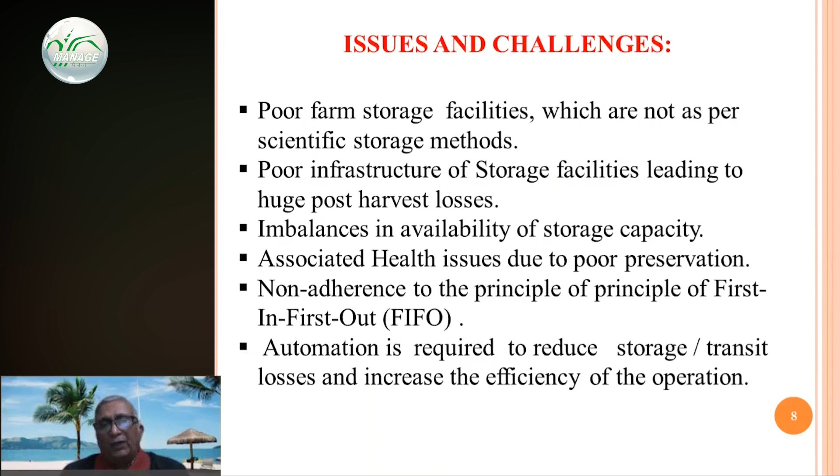This is a mind-boggling cost of losses in food grains. Food grains from agriculture production pass through various channels. It is handling at your mandis, then bagging at mandis, transportation, then again to railway goods shed where poor infrastructure is there, then processing and packaging, then to wholesalers, and finally to the consumer. In this entire chain, everywhere the food grains are lost.

According to the World Bank report, 1999, post-harvest losses in India amount to 12 to 16 million metric tons of food grains each year, which by very conservative estimates comes to more than 50,000 crores, which could actually feed 1/3 of India's poor. Even according to the report of the Ministry of Consumer Affairs, nearly 60,000 tons of food grains got damaged and became useless for human consumption between 2013 and 2017-18.

You see, mandis, where the stock is coming. Even the slightest rain causes damage to the grains. These wet grains are not suitable for consumption, rather they add to more cost in keeping them and disposing them. Sometimes the cost of disposal of these grains is also very high, and this grain which is affected with rainwater is responsible for causing so many fungus, so many bacteria, and unhealthy food availability to our masses.

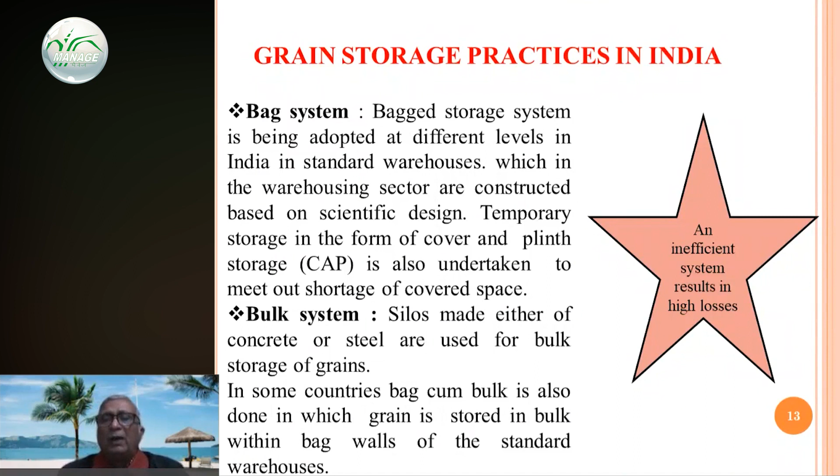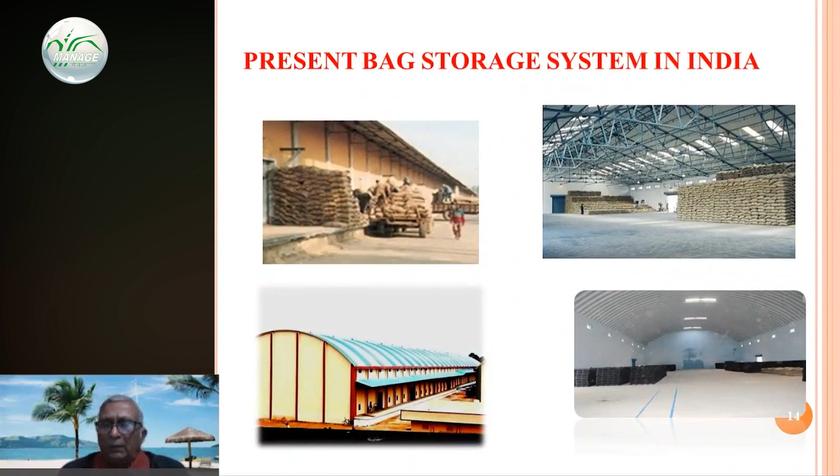This bag system is not considered very efficient because the resultant heavy losses due to handling operations or inefficient handling are quite high. It is a labor intensive system. A lot of labor is required. Multiple handling is there. Multiple handling is leading to heavy losses from farm to fork.

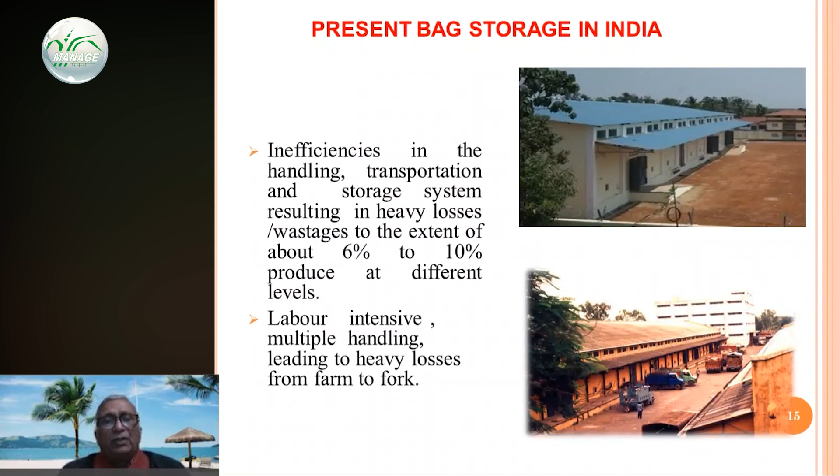Cover and plinth storage in India, though it is a temporary storage meant for just a few months, at times is continued for years together, leading to huge losses. Most of these stacks are made of 150 metric ton capacity on a good plinth, but sometimes the plinth is not a good one and drainage is not sufficient. But this has only one advantage, that it is low cost, nearly around 25% of the cost of the godown storage. But the losses are much higher, not only in terms of grain, but in terms of monetary loss to our country.

Traditional system, we were having these mud bins. Presently, we are having this bag storage. In future, we need to go for silos, preferably steel silos.

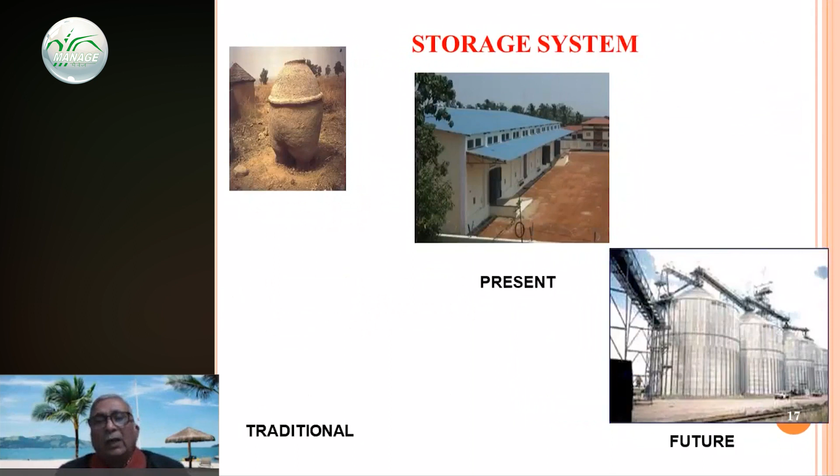Now, I will discuss with you temporary storage structures used in India and other countries throughout the world. There are different types. Cap storage, as you know, you have already seen that. Then flexible silos, bunker storage, prefabricated relocatable warehouses, cocoons, or large plastic membrane bags. I'll discuss one by one.

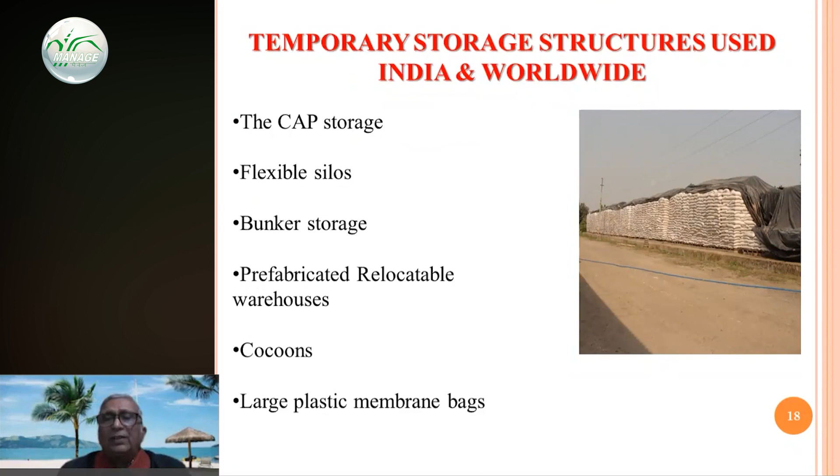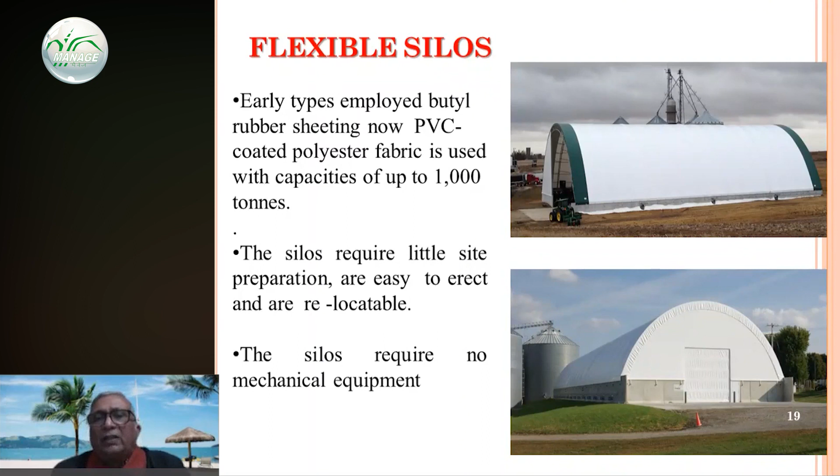You can see these flexible silos. These types of silos are basically made of butyl rubber sheeting, now PVC coated. Polyester fabric is used, which can have a capacity up to 1000 ton. These silos require very little site preparation, are easy to erect, and can be shifted to any place at any time at a short notice. They don't require any mechanical equipment. This type of flexible silo is used in a few countries.

And there is bunker storage, which is mainly used in countries like Australia. This is basically grain kept in bulk on the road with a very good drainage system, and on the sidings they are putting either concrete support or even metal steel support, and on top of it they are covering it with a very thick covering of about 350 GSM.

It's the most economical short-term storage to pile grains right from the harvest time and then reclaim after 9 months, 1 year; normally they are stored. You will be surprised that this type of bulk bunker storage can accommodate even 10,000 metric ton to 50,000 metric ton grains at one place in one lot.

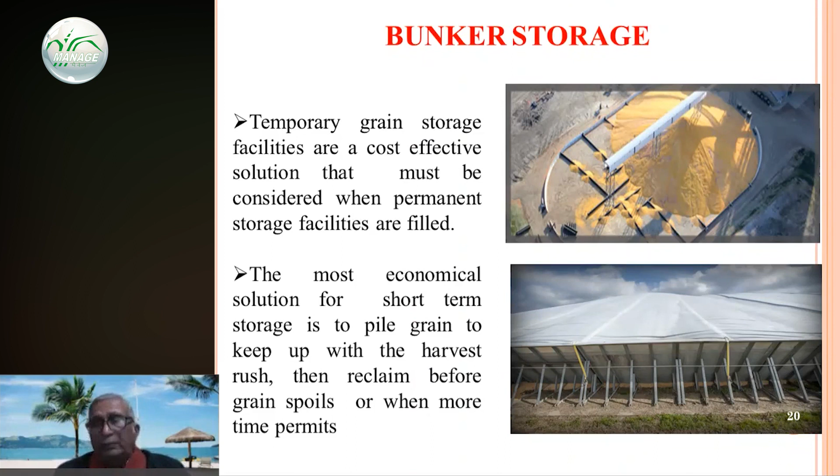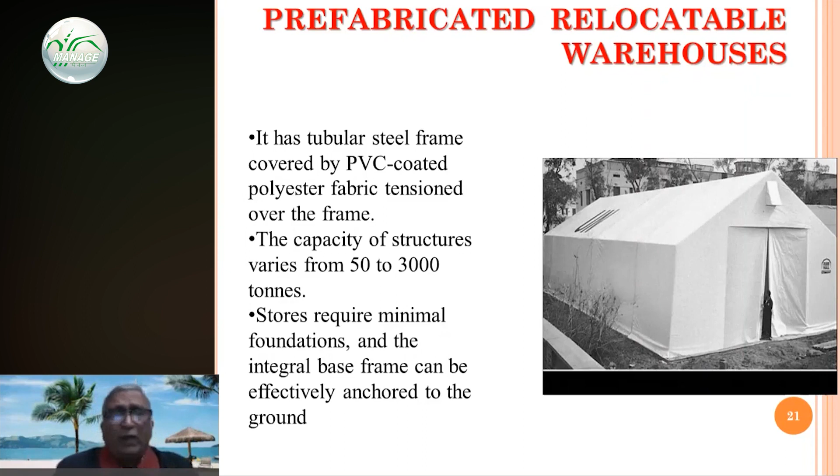You can see these prefabricated relocatable warehouses. This is a sort of tubular steel frame covered by PVC coated polyester fabric tensioned over the frame, capacities varying from 50 metric ton to 3,000 metric ton. These stores also require very minimal foundations, and the integral base frame can be effectively anchored to the ground. They are again a very good system of emergency storage.

Grain cocoon storage, how is this being done? This sheet is spread on the bottom, then bags are stacked in this cocoon and they are covered on top, and then there is a zip which gives a locking, and sometimes they are claimed as giving hermetic storage wherein the oxygen concentration gets reduced, carbon dioxide gets increased, leading to no use of pesticides.

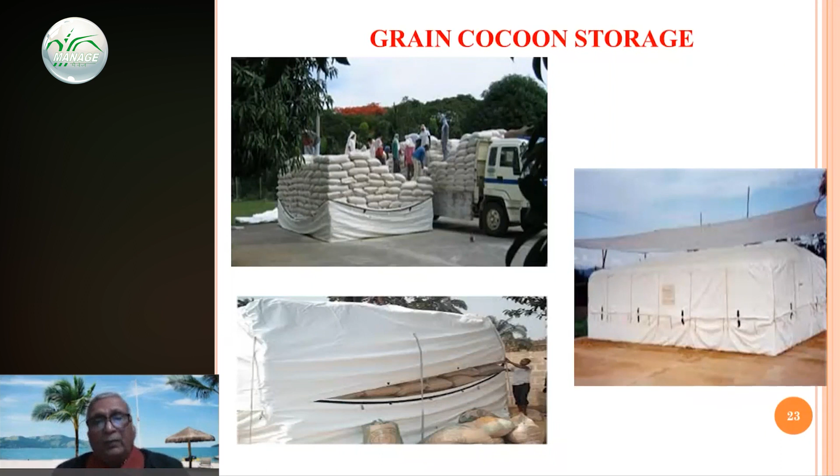Horizontal storage structures is bag plus bulk. In such structures, they are putting bags on all the sides, and the center of the bags is filled with loose grain. So this is a bag cum bulk grain storage done in some parts of China.

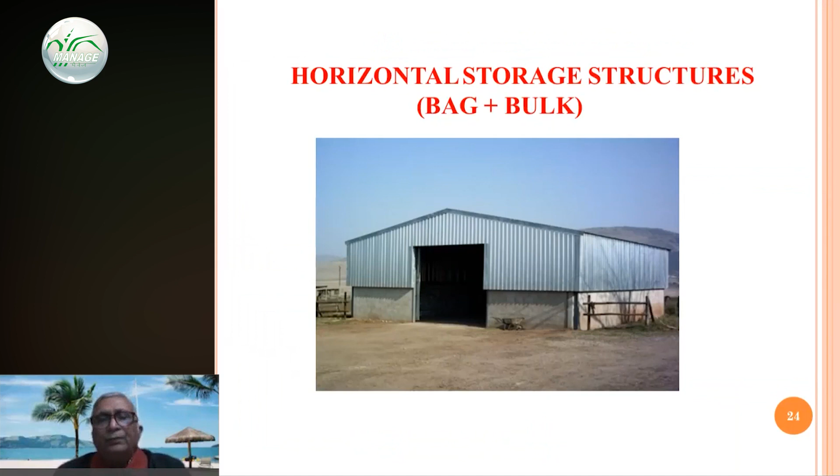You know, traditionally, hermetic storage was practiced in India. Hermetic storage is a very old technique, works on the same principle, elimination of oxygen and increase of carbon dioxide, which helps in controlling pests and fungus. Their reproduction capacity gets reduced.

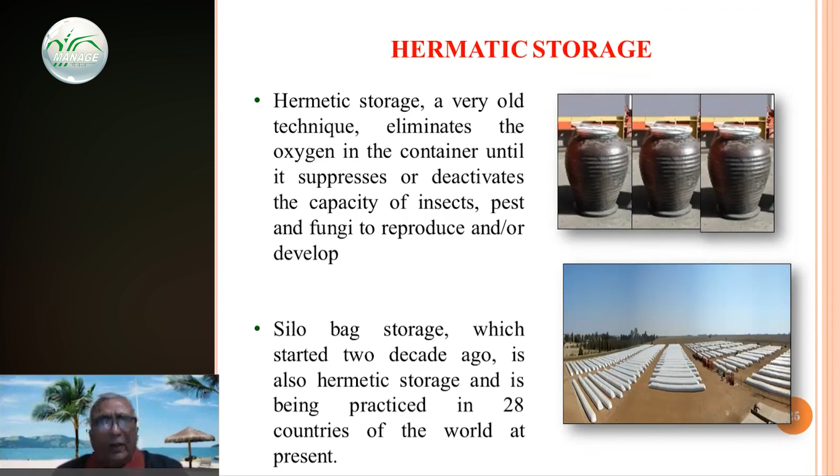Silo bags, which are now also being used in many parts of India, particularly Madhya Pradesh, started about 2 decades ago in Argentina. They have a capacity of about 200 metric ton, but need a mechanical system for filling. And these are one-time use bags only. But the only benefit is that they can be placed on any ground without any preparation, and the grains are quite well stored without any use of pesticides.

The silo bags are waterproof and have a good degree of gas tightness. Same principle, decrease of oxygen, increase of carbon dioxide. They can be considered a good alternative for storage for up to even 2 years as per the study.

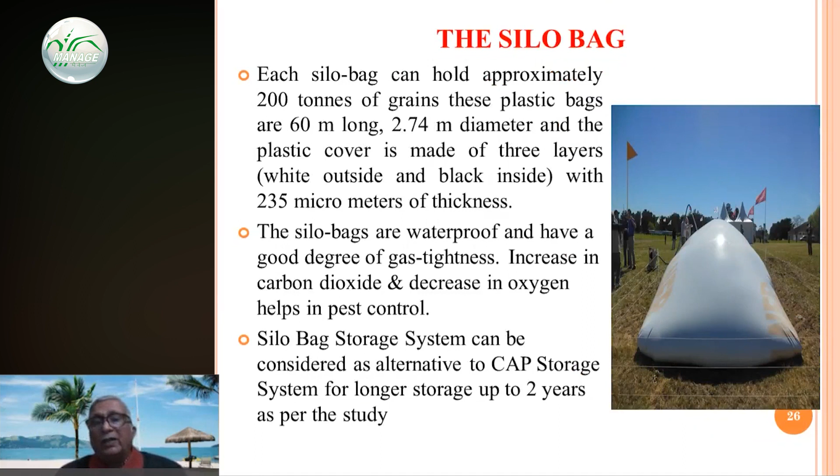Now, coming to what are the basic needs for good storage? What are the basic requirements for good storage? Number one is good sanitation. If sanitation is there, sanitation itself is the best pest control. Then we need to store the grains in dry and cool conditions. Why am I saying dry and cool? Because if you are just drying the grains and keep them in the bag or in some metal container, this will lead to condensation in the grains.

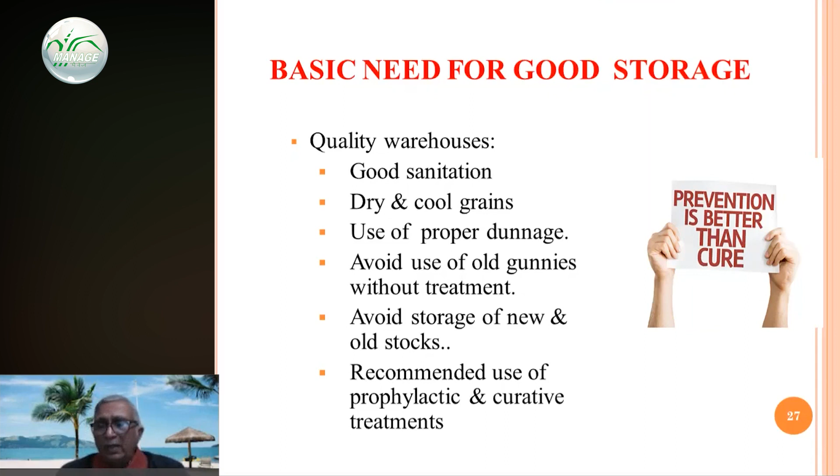And in the bag cargo, we need to use proper dunnage, avoid use of old gunnies. If old gunnies are to be used, they must be treated with the recommended pesticides. Avoid storage of new and old stocks together, and avoid storing damaged stocks along with the sound stocks. Always use recommended prophylactic and curative treatment as per the approved code of storage practices. Never mix any chemical, because mixing of pesticides in the grain is totally prohibited as per present laws in our country.

Management plan for insect control includes three basic fundas. One is your hygienic conditions, that means better sanitation, followed by preventive measures in the form of prophylactic treatments with chemicals like malathion and deltamethrin. If the preventive measures also fail, then we have to go for fumigation.

We are following the system of economic injury level. When that level of infestation goes beyond few, from clear to few, that means more than 2 insects per 500 gram of the sample, we invariably go for fumigation with aluminum phosphide.

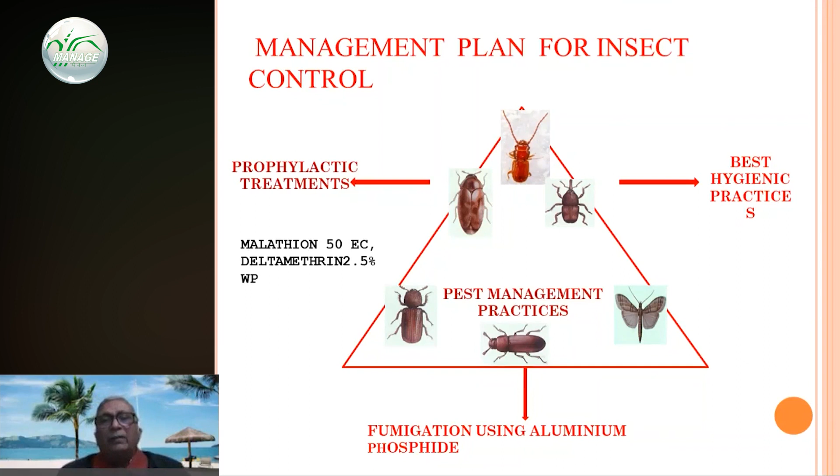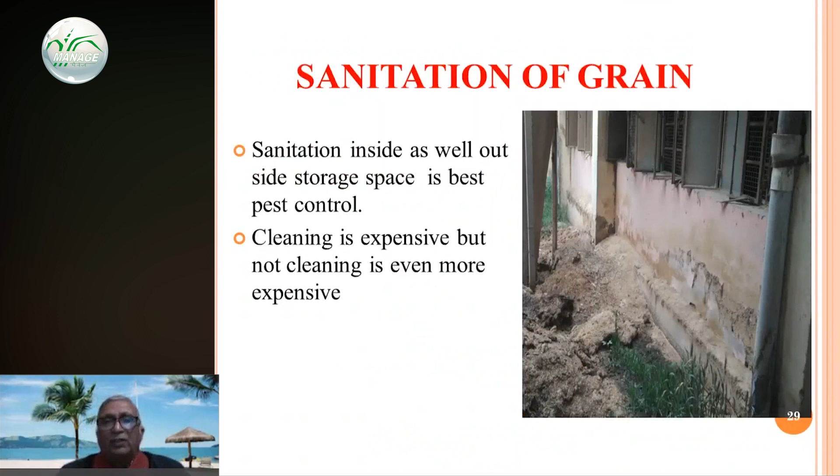What exactly do we need to do? We need grain protectants for prophylactic treatments. Incidentally, we have only 3 recommended chemicals in India, and out of these 3, malathion and deltamethrin are being used. Pirimiphos, though it is approved, is not available in the Indian market.

There are so many molecules available throughout the world, but we don't have any alternative right now until the government approves. And as all of you must be knowing, we cannot try any new chemical until and unless it is registered and approved by the Central Insecticide Board of the Government of India.

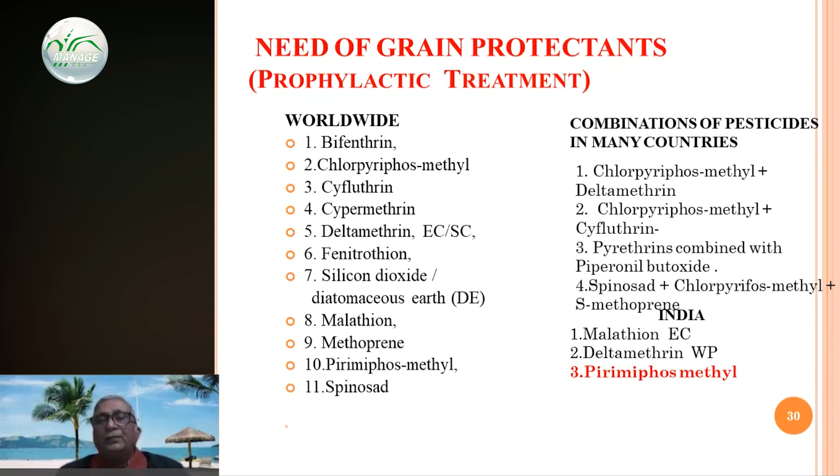Worldwide, they have so many fumigants, but in India, right now we have only one chemical, that is aluminum phosphide. Methyl bromide is used, but it is permitted only for quarantine purposes. It is for import and export of the grains. We cannot use methyl bromide for normal fumigation. So we are left with only one chemical, that is aluminum phosphide.

Best known trademark is CELPHOS, which is an ideal fumigant. This aluminum phosphide is the most popular fumigant worldwide, used in more than 160 countries. And Excel Crop Care, now Sumitomo, was the first company in India to introduce ALP tablets way back in 1967 with the brand name CELPHOS. It is readily available, easy to apply, cost effective, and it has excellent penetration properties.

The gas phosphine, released from the tablets or the pouches by the action of atmospheric moisture and moisture of the grain, is capable of killing all stages of insect pests and has no adverse effect on the ozone layer or even the seed viability. Why was methyl bromide banned? It was basically banned because it was adversely affecting the ozone layer and it was not suitable for most of the commodities.

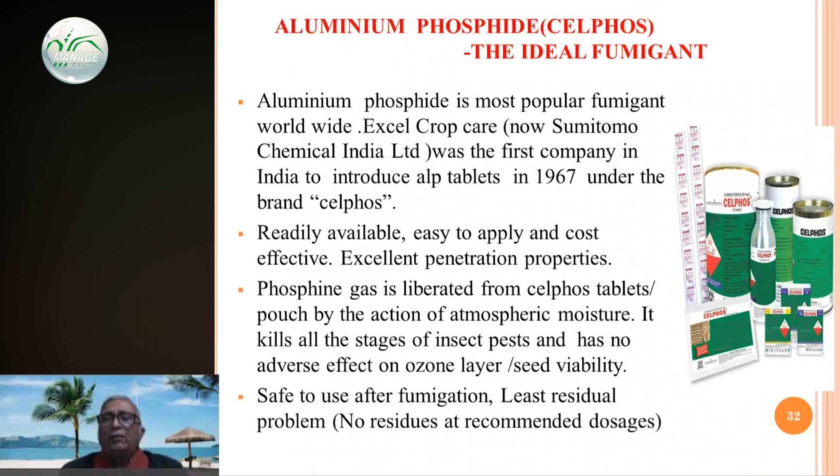Safety wise also, this phosphine is more safe. It has the least residual problems. Normally there is no detectable residue if the chemical is used at recommended dosages. It's available in different forms nowadays, in the form of pouches, in the form of chains. It is a convenient, safe, and effective fumigant.

Now, many people don't know how to use it. Tablets, if you are using them, can be kept on paper or enamel plates and need to be manually distributed on the stacked bags, and the stack is to be covered by a gas proof cover. Many people have many myths about its application. They say that gas is heavier, so you put 60% on top and 40% on bottom.

No, it's not required. As per the studies carried out by FAO, there is no need to put tablets on top. And even the BIS is going to revise this application of aluminum phosphide, and I think in maybe the next 1 or 2 months, the new standard will come out.

The tablets can be put straightaway on the bottom in an enamel tray or in a paper bag, and if there is a pouch, it can be inserted anywhere up to the approachable distance. If you don't have wooden crates, then possibly you can put the pouches or paper plates at any places in the bag gaps. Minimum exposure is 7 days, after which you can remove them. Then you have to ensure proper sealing and proper monitoring of the gas to get effective fumigation.

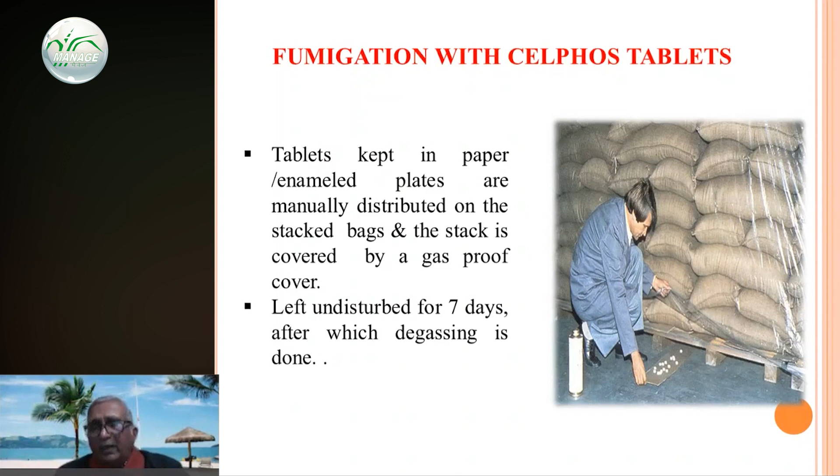If you are having silos, these silos can also be fumigated using the CELPHOS tablets. What exactly to be done? If the silo is up to 15 feet high, you can put the tablets on top of it in some gauze, in some case, and if the silo is of a bigger height, say 2000 ton capacity, like your Adani silos, then you need either a generator or an air circulation system to move the gas right from top to bottom and the other way around.

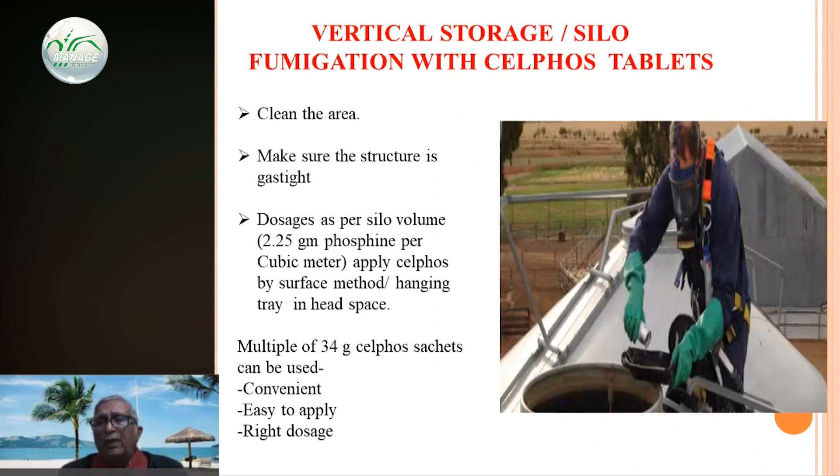Doses for phosphine: on tonnage basis 3 tablets per ton, and on volume basis it is 2.25 gram phosphine per cubic meter. 2.25 gram phosphine means 6.75 gram of ALP per cubic meter, because a 3 gram tablet will give us 1 gram phosphine. So to get 2.25 gram phosphine, we require 6.75 grams of ALP. Even sachets are available. They are convenient, easy to apply, but giving the proper doses and maintaining the concentration throughout the exposure period of 7 days is more important for good results.

Bulk handling in India was basically started way back in 1959 at Hapur, when these 20,000 metric ton metal structures were created and inaugurated by the then President Dr. V.V. Giri. Now, Adani Agri Logistics is one of the earliest in India to adopt silo storage. Currently, it is the only silo storage operator in the country with a capacity of around 8.75 lakh tons. They aim to have 2 million ton capacity by end of this year.

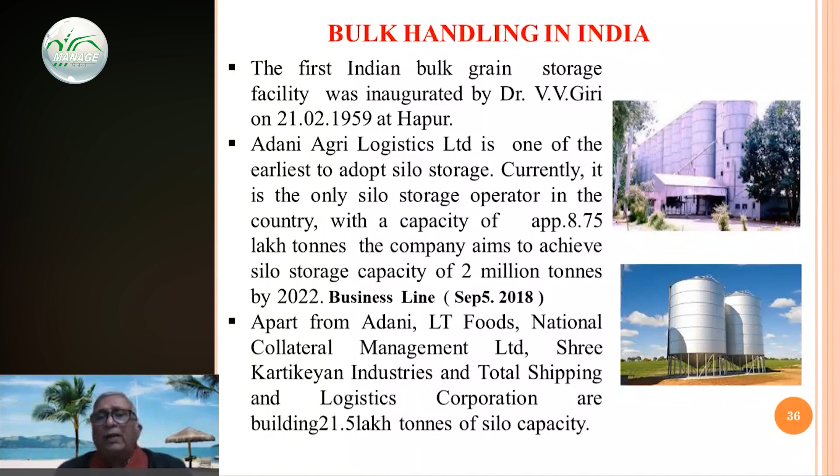Apart from Adani, LT Foods, National Collateral Management Limited, Shree Kartikeyan Industries, Total Shipping Logistic Corporation are building nearly 21.5 lakh tons of silo capacity. Even Food Corporation of India has floated tenders, and they are in the process of creating about 2 million ton capacity in the next 2-3 years.

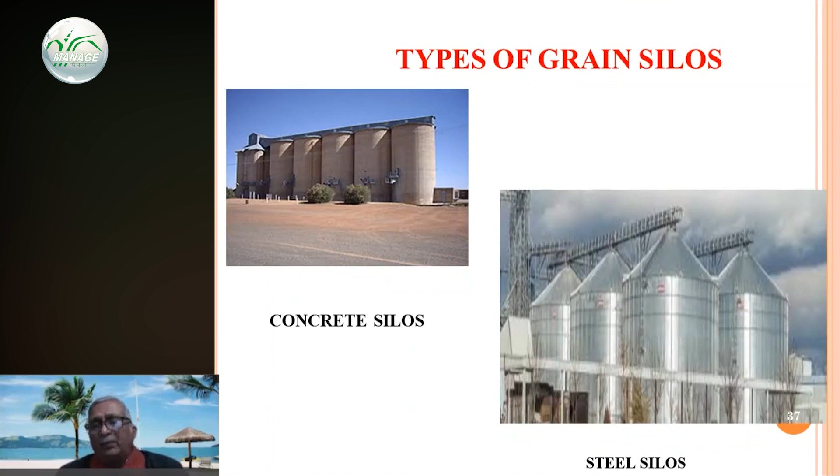What types of grain silos are there? Concrete and steel silos. Now, which should we use? I think steel silos are preferable under most circumstances, except near the seashore, where due to high humidity the steel gets rusted and affected. In other places, steel silos are economical and more efficient to be used.

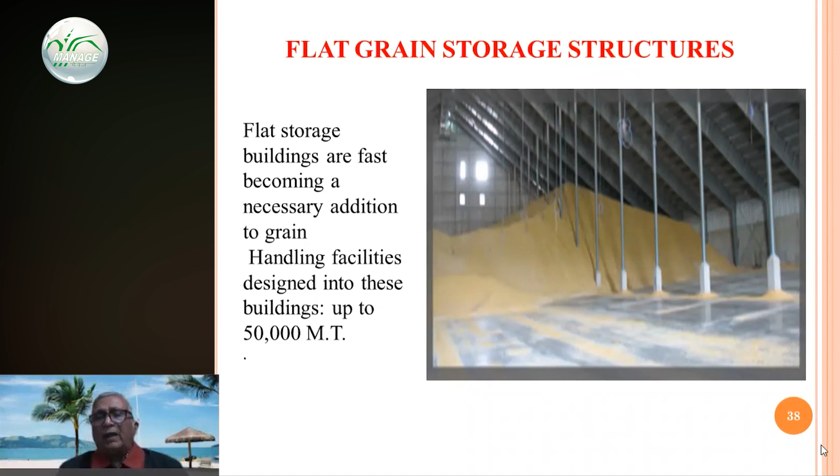Even flat grain storage structures are available in countries like Australia, Canada. They are a good addition, and even in a small place of, you see, 2 to 3 acres with an operating transportation system, they can store about 50,000 metric ton stocks, whereas for construction of 50,000 metric ton in a traditional manner, we require about 20 acres.

Government has also taken a lot of initiatives to introduce bulk handling. They made a national policy on handling and storage of food grains way back in 2000, which aims to reduce storage and transit losses and to modernize the system of handling, storage, and transportation. In this integrated system, Adani or the agencies which have benefited are doing it on behalf of Food Corporation of India.

Government is planning to take further steps to utilize vacant land with the railways to make some bulk handling structures. Pilot projects even for rice silos are being undertaken on trial basis. So government is very serious in switching from bag to bulk, but the pace at which we are doing it is very slow. We made a policy in 2000, but still we are at the beginning only.

Cost of silos in India. Some people question, will it be costly? Various studies have demonstrated the cost of operation in bulk was 40% lower than conventional godowns. The cost in making may be higher, but cost of operation is ultimately low, which can give a good rate of return. Even the World Bank study in India indicated that investment cost of $1.6 million could lead to saving of more than $260 million per year.

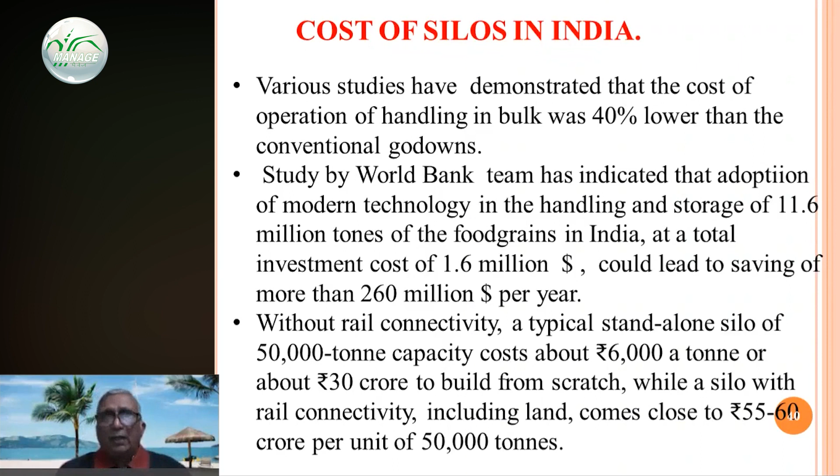But we are having overall savings; it is cost effective when operational cost is 40% less. How is the operational cost reduced? Cost of gunnage is reduced, labor cost is reduced, even the transportation and storage losses are reduced, consumption of pesticide is not there. Just see all these things. The traditional system was having a lot of limitations, particularly in the unorganized sector. The structures were not scientific, not even waterproof. Hooks were being repeatedly used.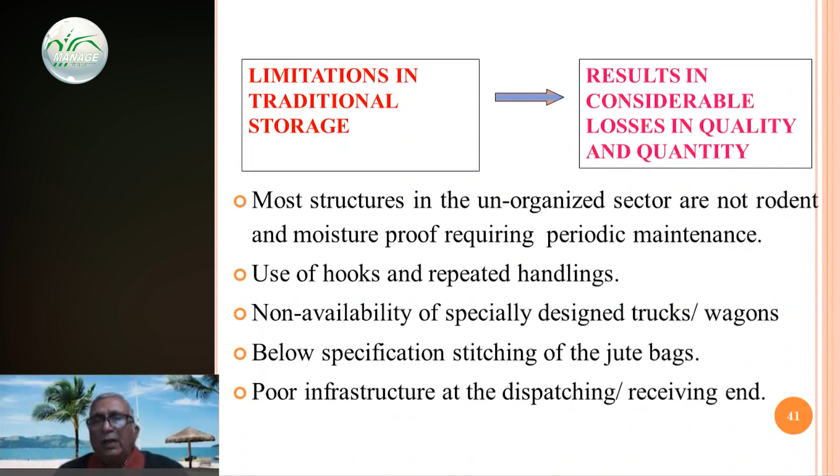Non-availability of special trucks, because in the wagons also, sometimes you see the railway is providing wagons which were earlier used for loading coal or even cement. If they are used for food grain handling, how much loss will be there? Colossal loss. Below specification stitching of the jute bags, leading to pilferage. Poor infrastructure at all the goods sheds, dispatching, or even the receiving sheds. All these factors are contributing towards abnormal losses, ultimately bringing a bad name to us and affecting food security.

Why do we need modern storage? We need modern storage because we can build much more capacity in the same area. Land is becoming a costly affair, and we cannot afford to provide that much land for construction of storage capacity, because we can manage with bulk storage in a very small space, nearly 1/3 of the land required for bulk storage as compared to land for bag storage.

Lesser contamination of grains due to rodents, insects, and microorganisms. Operating cost is very low. Labor requirement is also very less. It keeps the grains safer for a longer period, regardless of the climatic conditions, and helps in reducing post-harvest losses, better productivity, better quality of the grains, better efficiency.

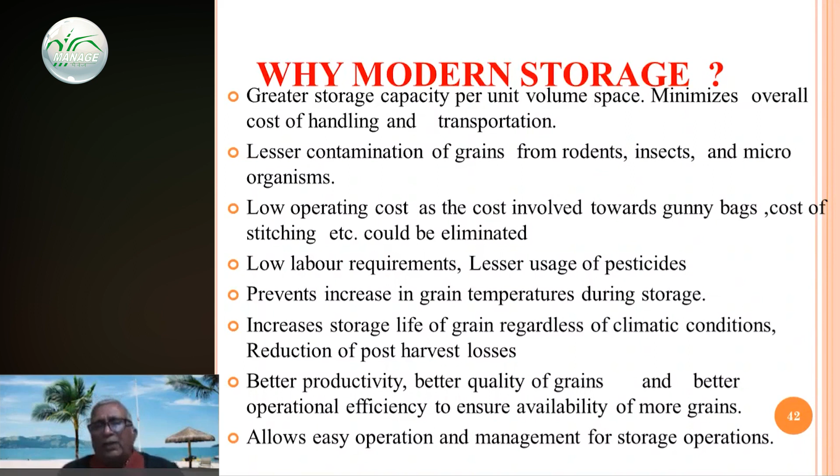Efficiency: one rake of 4,000 metric tons can be loaded in less than 2 hours or maximum 3 hours, whereas loading a 4,000 ton rake in bags requires almost 24 hours. So this is efficiency. It allows easy operation and management for storage operations.

Another thing is sealed silos. Most people are not aware what a sealed silo is. They feel it is a normal system that is sealed. In fact, sealed silos are those silos which pass vacuum pressure testing and provide safe fumigation, no leakage of the fumigants, and are gas tight. We need to have this type of structure.

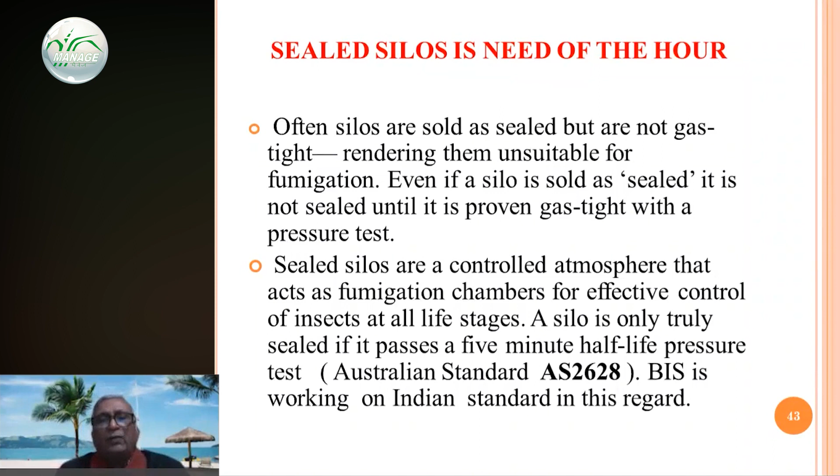Unfortunately, no standards from the Indian government are available yet for sealed silos. I have already requested BIS. They are in the process of formulating Indian standards comparable to Australian standard AS2628. I hope that BIS will come out with a solution in due course.

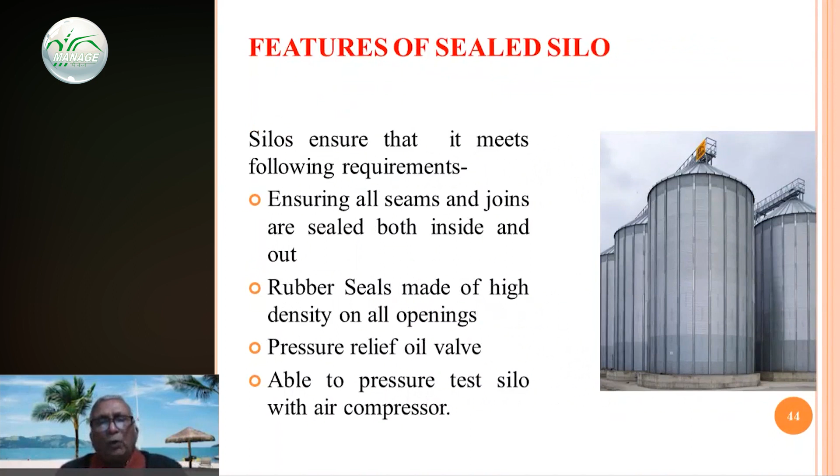A sealed silo should meet the requirements of all seams and joints being sealed, both from inside as well as outside. Rubber seals made of high density on all openings, a pressure relief oil valve, and the ability to pressure test the silo with air compressor.

We are having so many benefits of bulk storage and modern facilities. It is our earnest duty to minimize the grain losses, because the food that we have on our plate is a result of an immense amount of hard work put in at various stages by our farmers and industries who are providing inputs to the farmers. Before we consume it, we should give it proper respect. Let all of us promise to never waste food and contribute to save food for those of our fellow countrymen who are hungry.

Finally, I wish to conclude with a few words. Acceptance of bulk storage as a concept by our country is required. We need to promote farm level bulk storage structures with immediate effect, which will ease the pressure even on the procuring agencies. It will have double benefits.

Once the farmer has his own storage in the form of bulk, he will have the benefit of selling when the prices are high in the market, and also there will be no pressure on the procuring agency like Food Corporation of India to procure the entire grain and put it under unscientific facilities like CAP storage. So farmers storing and providing bulk facilities is very important to us.